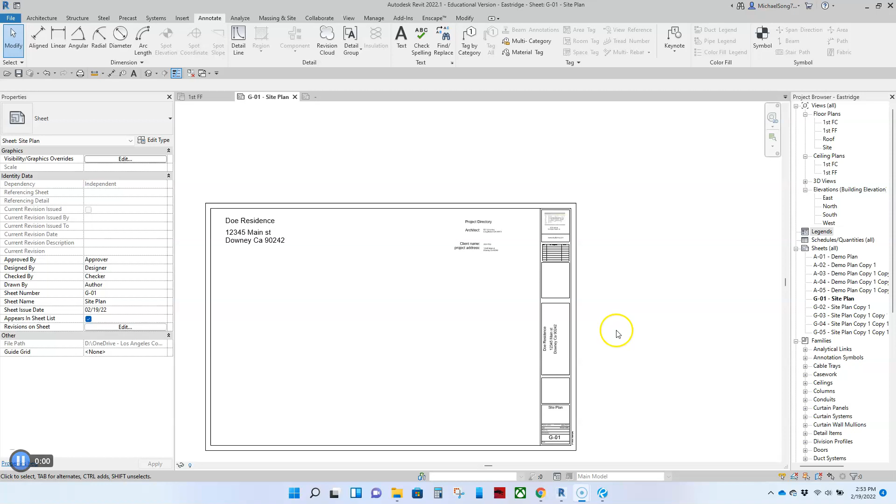All right guys, we are going to spend quite a bit of time on the cover sheet and how you should set up your cover title block and inputting all the information for the cover.

So let's just go back here. Let's create a symbols legend from scratch. Of course, if you guys are working at an office, they'll have all of these things for you, but I want to show you guys from scratch how to set it up. So let's do a symbols legend.

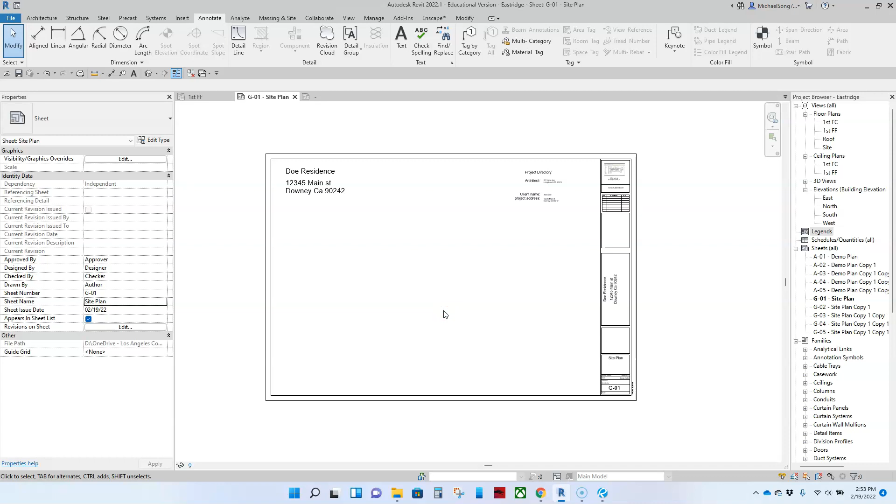The symbols legend really will be done on a template. We will cover what the template's all about maybe at another class or a more advanced Revit class. But in your case, let's just create one for your project.

So if you come down here to all your views, here's all your plan views. Here's legends. You want to right click and say you want to create a new legend.

So let's first describe what a legend is. A legend is almost like a family in a sense, but it's a separate sheet. Think of it as a separate sheet of paper that you can create whatever you need on, and then you can drag that onto anywhere you wish, into other multiple sheets of paper. So just think of it as a brand new sheet of paper. And of course it's a little bit more complex, but I don't want to get too much into that.

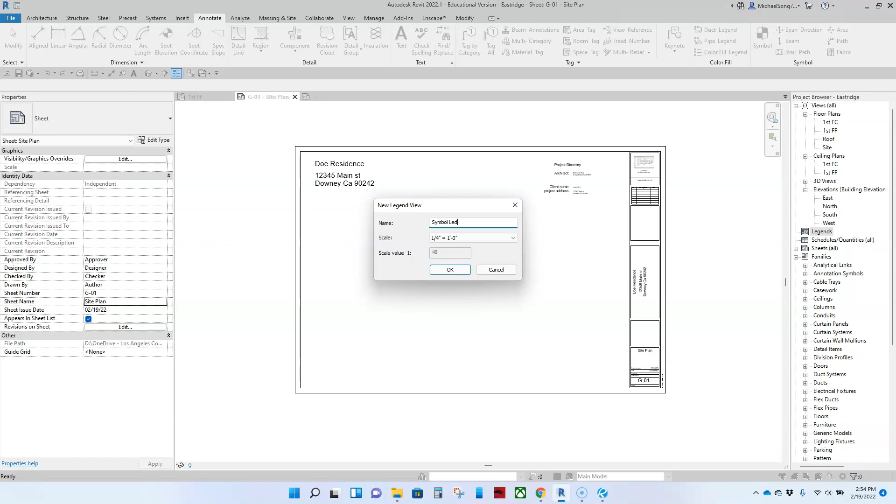So we'll just call this symbols. Symbol legend. Can't see my keyboard here. Jeez, I can't type this morning.

So now I have a brand new thing called the symbol legend, which I've opened up. It's just a blank sheet of paper. Of course, I can close it and then double click on it. So this is where I want to create a symbol legend.

View scale is kind of important because it's going to determine how big your text shows up on a sheet of paper. So let's just kind of go at it.

So what I did was I took a screenshot of my legend to just try to figure out how to recreate this thing. And I have a computer, so you guys can do it yourself also. So I'm going to say import image.

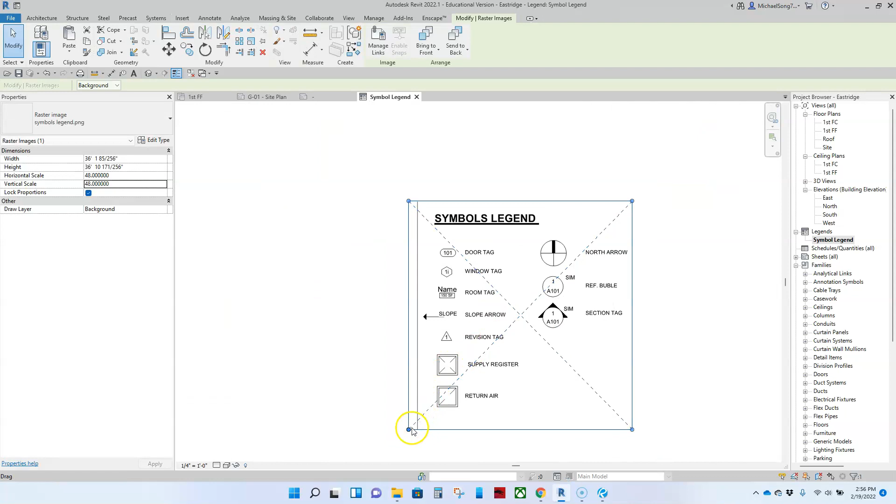So I have it in here. This is just a sample. So I first want to have a text called symbols legend. All right.

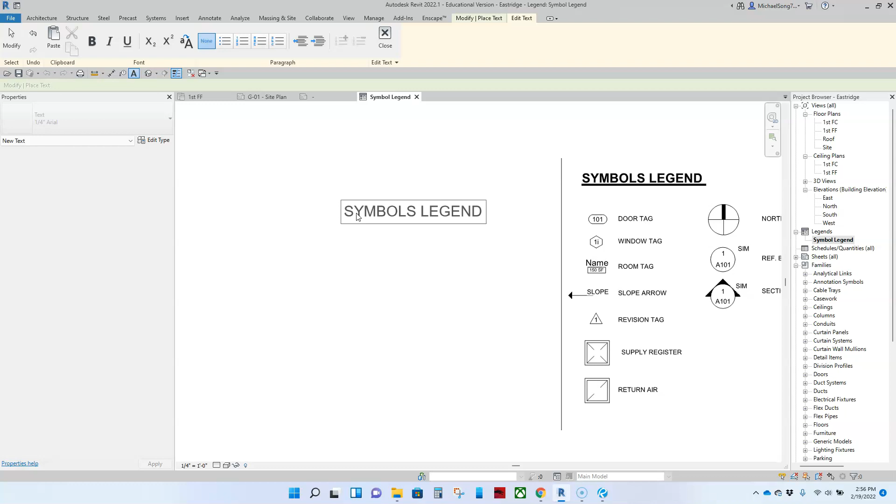1/4 inch sounds good to me at the moment. Yeah, all caps. Gosh, I can't type today. Okay, so I have that. Let's just put in a bold underline.

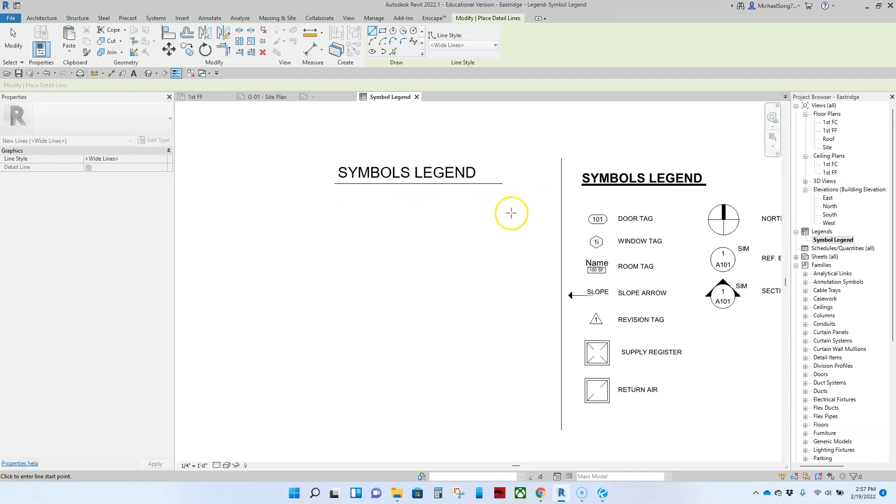So I'm going to go to detail lines. Oh, this is the first time I guess I'll be covering this, but line weights. By default, Revit comes with these line weights. At another time, I'll show you guys how to customize that. But I want wide lines, which is their thickest line that they have. If you kind of want to get a preview, although the preview is kind of not great, you can hit this button here, which actually shows you how thick that line is versus just the default view. So I'm good with that.

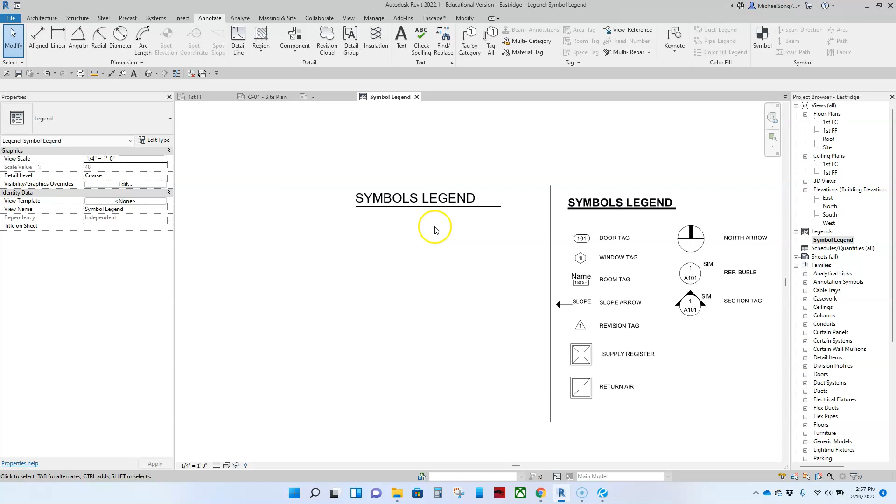Actually, as a matter of fact, let me show you guys later. All right, so let's first put in some tags.

So now you have a choice of actually drawing this little shape and then putting a text, just random text saying, whenever you see this, I mean door tag. Whenever you see this, I mean window tag. Whenever you see this, it's a room tag. So you can literally draw it and write it out from scratch.

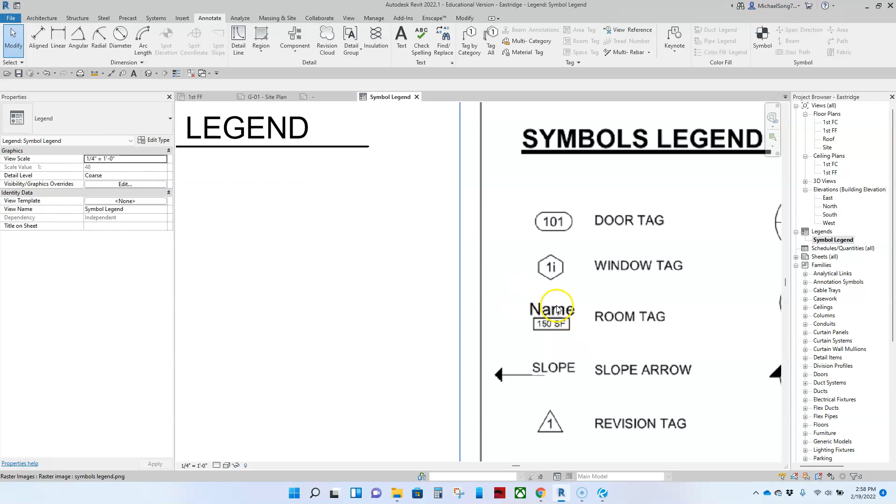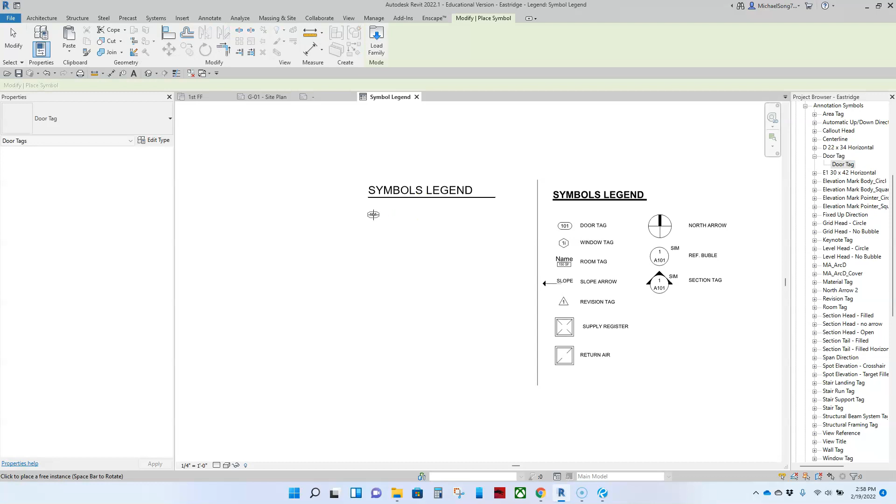But if we're going to use the Revit symbols, which they already did, then there's no reason to recreate that. So what I'm going to do is come down here to all the families that's loaded into my file, and then go into annotation symbols, and I'll see a door tag. So I can grab one of these things over, and there it is, right? And so this is a door tag. I didn't have to redraw it.

And you do have to do this part though. We're going to put a text. And since it's not a title, I want a smaller text. I am going to write, oops.

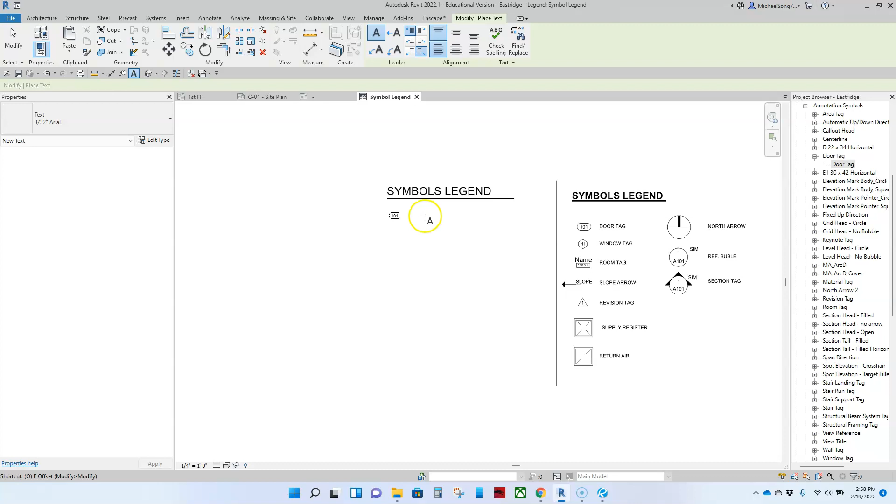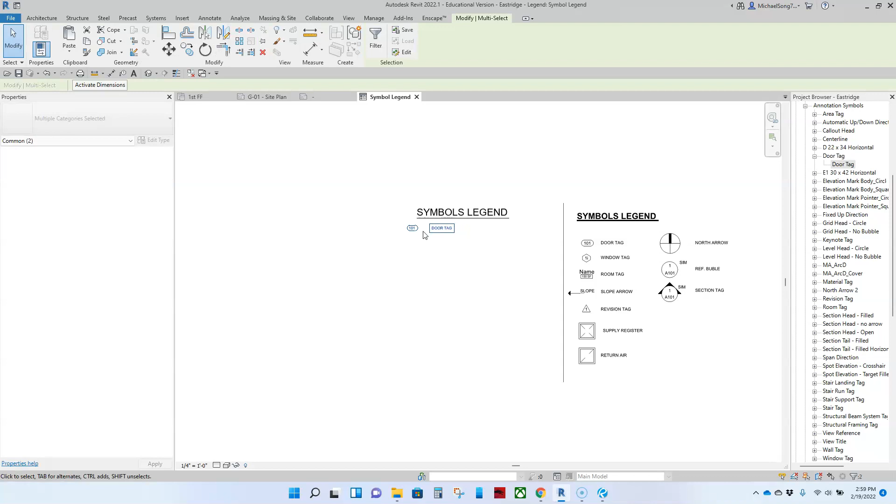So this is basically what a symbol legend is. We're just saying, when you see this symbol, this is what I mean, right? So I'm saying that's a door tag symbol. And I can make it smaller. Let me do some housekeeping here so that I can have 2 rows of symbols.

Into this now, the window tag, you will find it here. Let me put all the tags in, and then you guys can write your own names on it. Room tag.

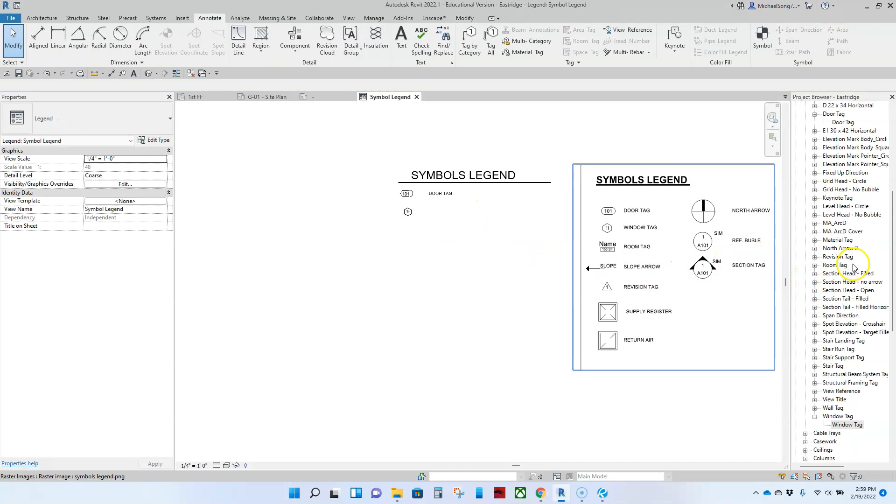So I have 3 different room tags here. Let's just take a look at all of them. I have this room tag, which is just a room name. I have this other room tag that'll give me a name and a square footage on the bottom. But there's no reason for me to do all the different tags that I have. Basically, when they see a square box, it just means it's a room tag.

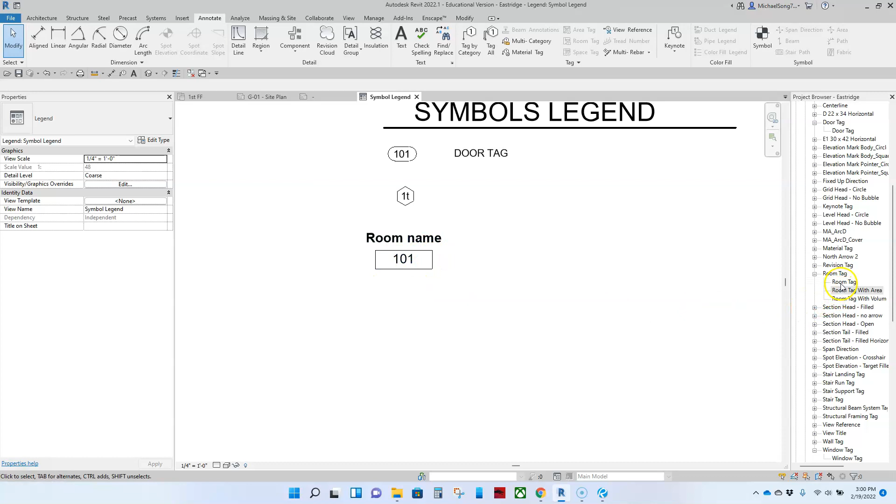So I'm just going to use the very first option here. I'm not going to do the slope arrow, but I'll do a revision tag. This will be the revision tag.

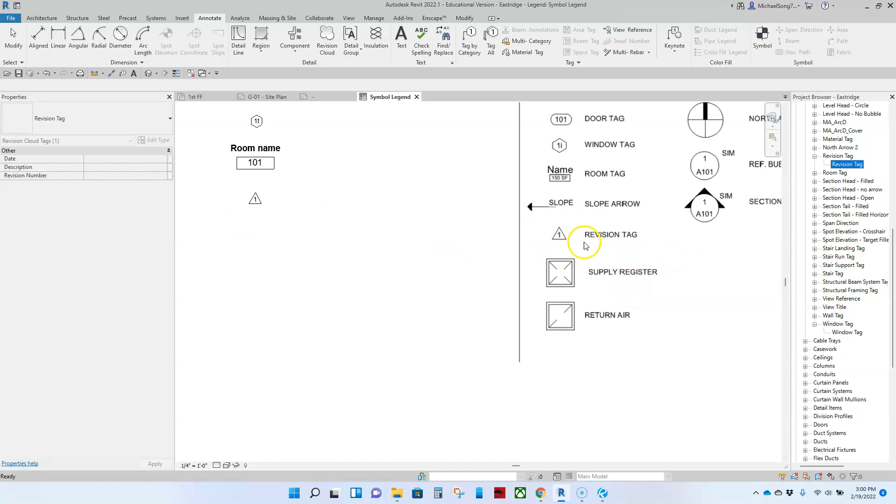Sometimes when we do HVAC, sometimes we don't do it. Again, you guys can load up all the tags here and pop it in if you like. So try to go ahead and find the tags and put it and make it look like my example or the handout. I'm not going to go through all of them. I'd like you guys to find and search yourself, but let me at least help you find these things.

So north arrow, what do I have here? Yeah, that's cool, north arrow. These are views, so if we come here, that's not what I want. No, I didn't need the view tag, my bad. So these are section cuts and stuff like that.

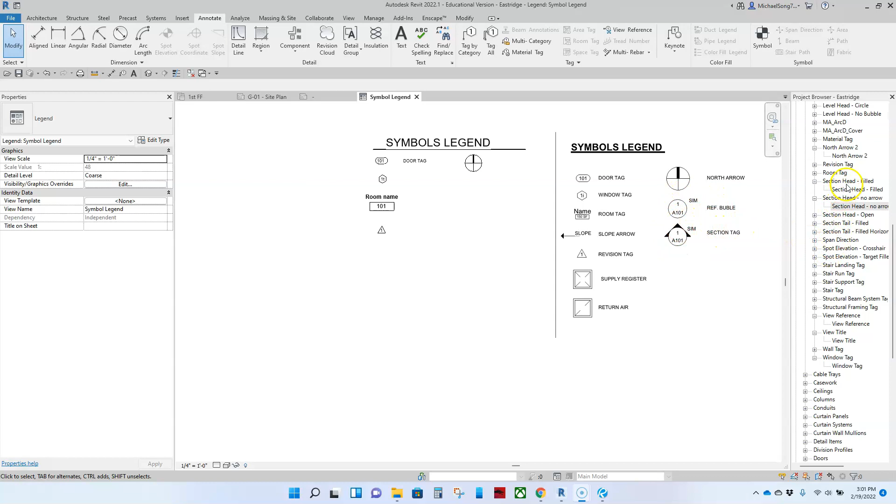So I can go to section head filled. If I bring that over, that's the arrow with the triangle filled in. I can bring the section head, but I don't want the triangle, so I'm going to say no arrow. Bring that in, and you guys can finish out the rest and put in all the text, okay?

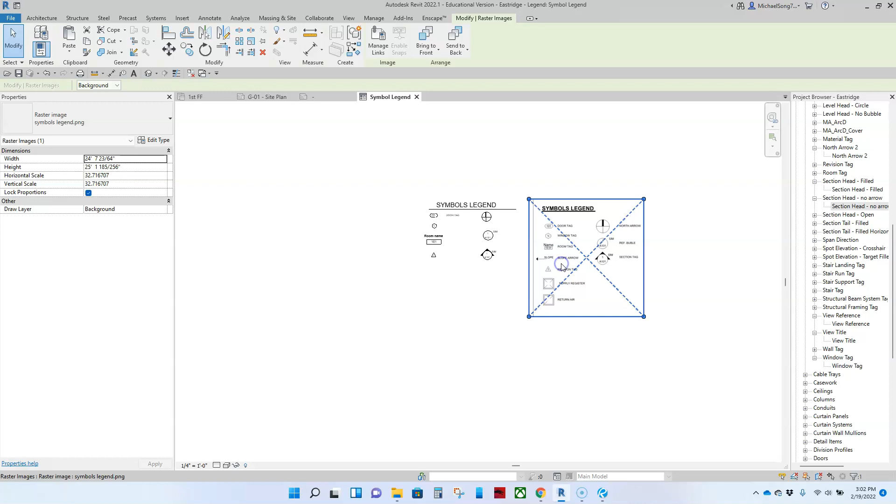So let me just show you. All right guys, I am back, and I've created the symbols legend here.

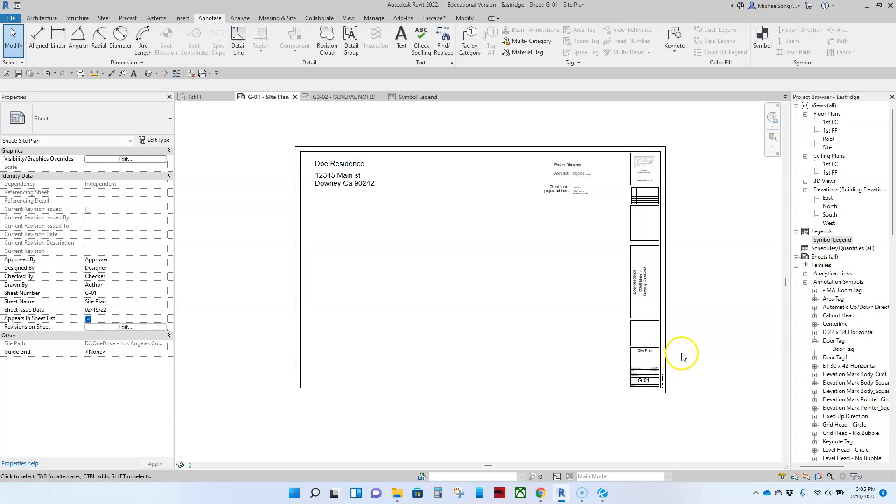Now let's figure out how to bring that symbols legend into our cover sheet, our site plan, or our title sheet. All you have to do is find your symbol legend, because we've created that. Just drag it out, and there you go.

It's going to show right down here, just like that, right? And then we'll do the legend, site legend, and we'll do all of these other things as we continue on with this demo.

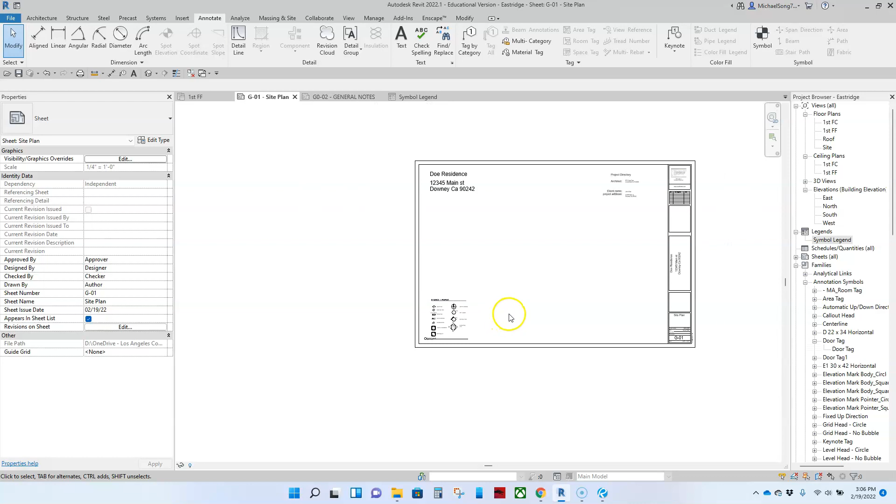All right, so here on the symbol legend, every view that you bring in should have a view title and a view title number. But in this particular case, I don't want a title. I already have my title here, and I don't want any numbers or anything like that.

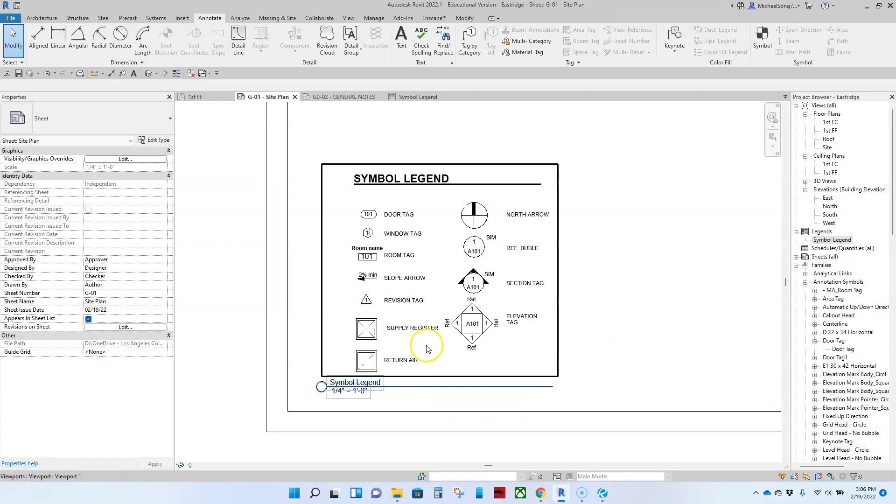So I want to get rid of this. Well, how do I do that? First of all, you guys have to understand the anatomy of a view. So this is this view, right?

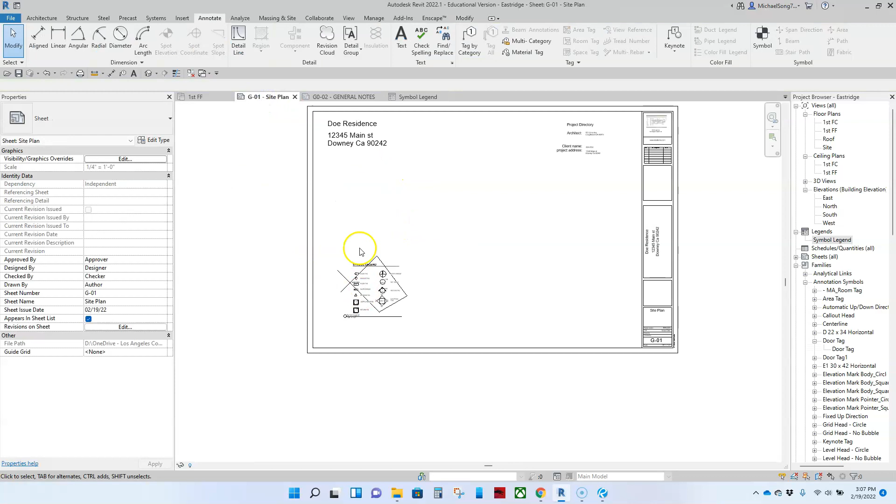So if I double click this, this is the blank sheet of paper I have, for instance, whatever I draw here. If I come down to my title sheet, it's drawn here. And so that little dark line, whenever I put my mouse over it, that's the window of my view. If I double click within that box, I'm actually in that drawing as if I'm editing that particular view, just like if I was here in this window here, right?

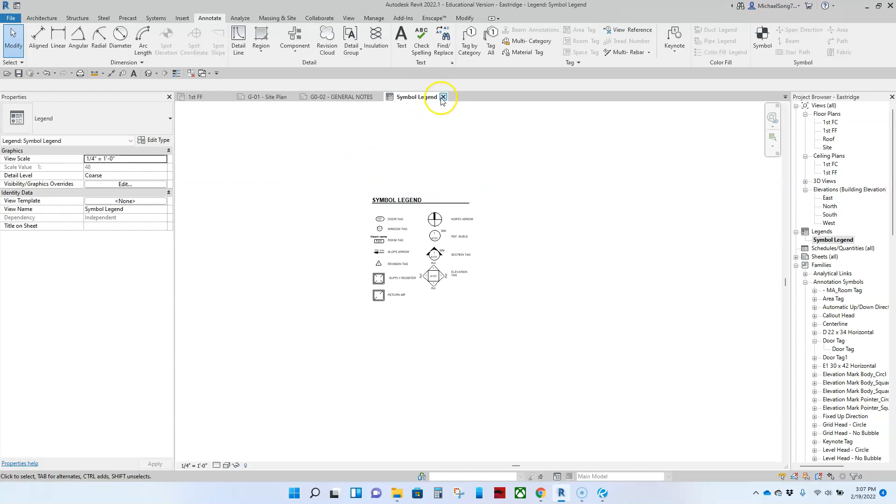Even if I close it, you notice that anything outside of the box is a little bit gray. It means that I am actually in that view, right? If I double click outside of it twice, now I'm in my overall view.

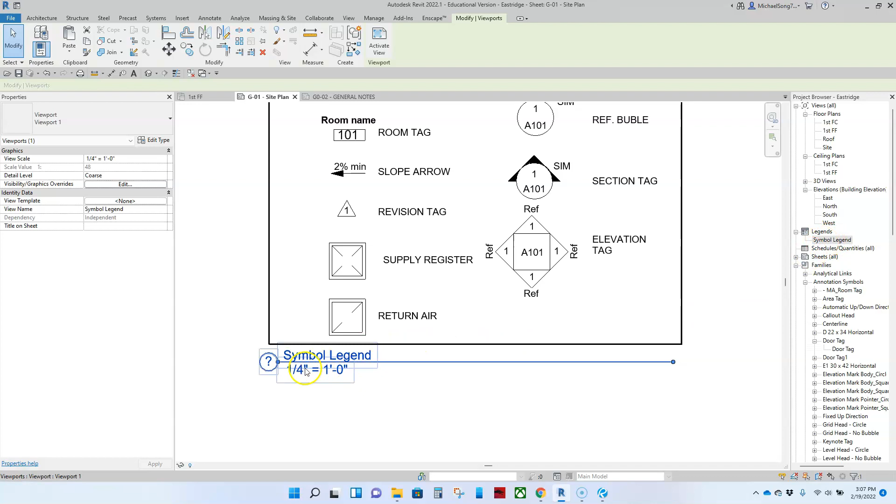So every view window obviously has a name. Well, where does this name come from? Well, from the name that I give it here. It has a scale. Well, where did that scale come from? If I double click here, again, I have my name, or I gave it a name, and then the scale of my view is down here, right?

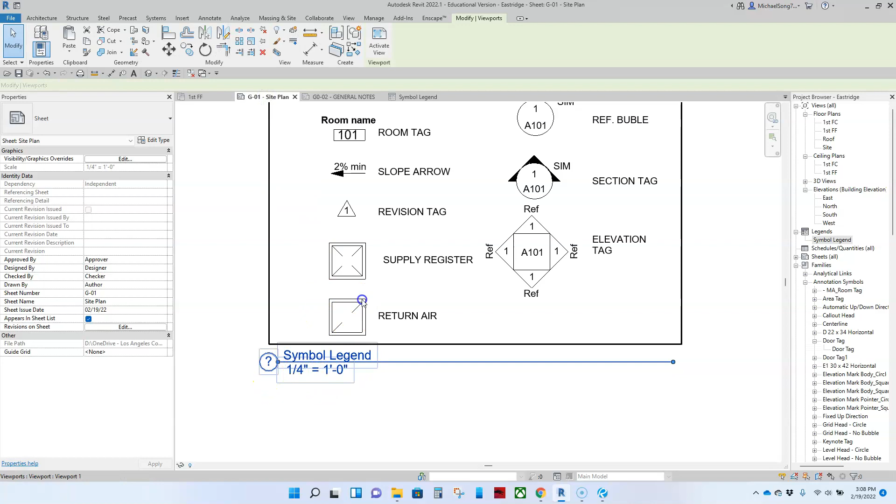So it's set up in particularly my legends view. That's where they get that information. And the number, I can name this any number that I want, this particular viewport, right? So we'll get into that.

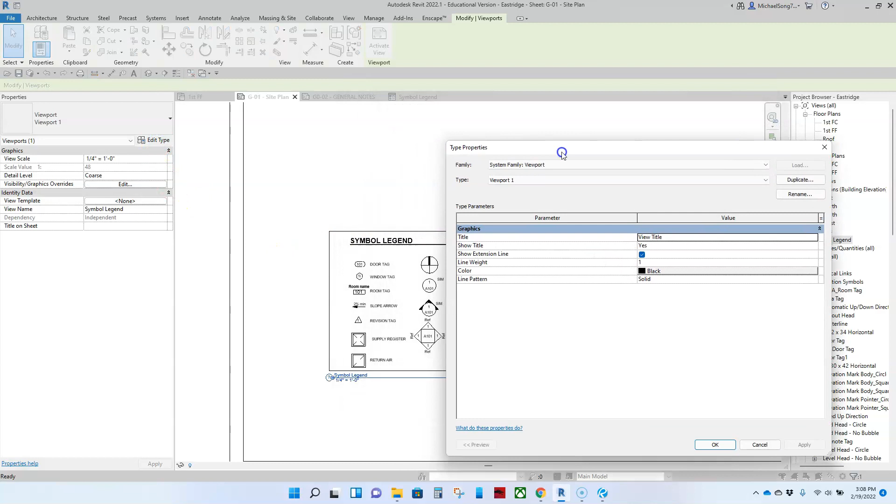But in this particular case, I do not want to see a name or a title of my view. It's going to be titleless. So if I click this, it's going to tell me that it's viewport 1. And if I go to edit, it tells me if I want to use the family viewport number 1, it's going to have a view title.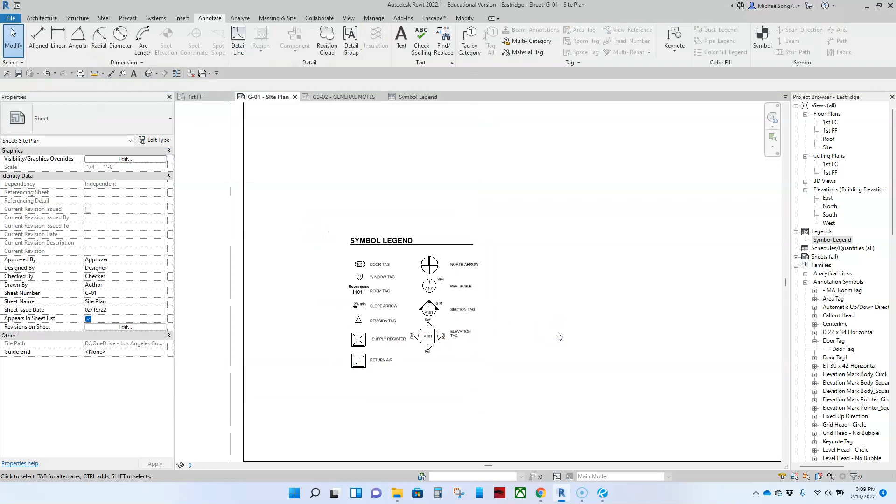So what I want to do is duplicate that and just say view. I'll name it myself, view title, no name, because I don't want any name. Then I can just say no, and let's see what that does. So there you go, it's gone now. It does have it, it's just not showing it. But if I now go to viewport 1, it'll show me this with the scale and the whole bit. If I go to no name, it'll just give me my symbol.

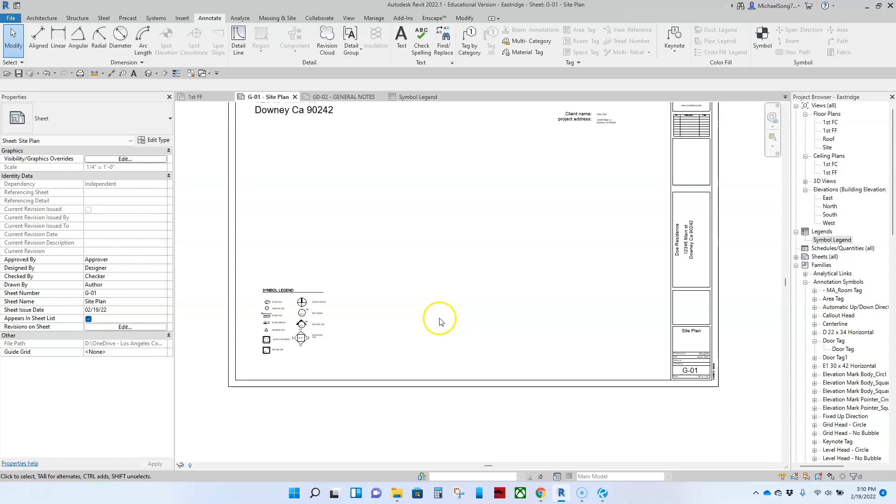All right, so let's go ahead and continue to make a little bit more legends. I realize this is going to take you guys a little bit of time because you're setting up everything from scratch, but please look at this as good experience and opportunity for you to practice.

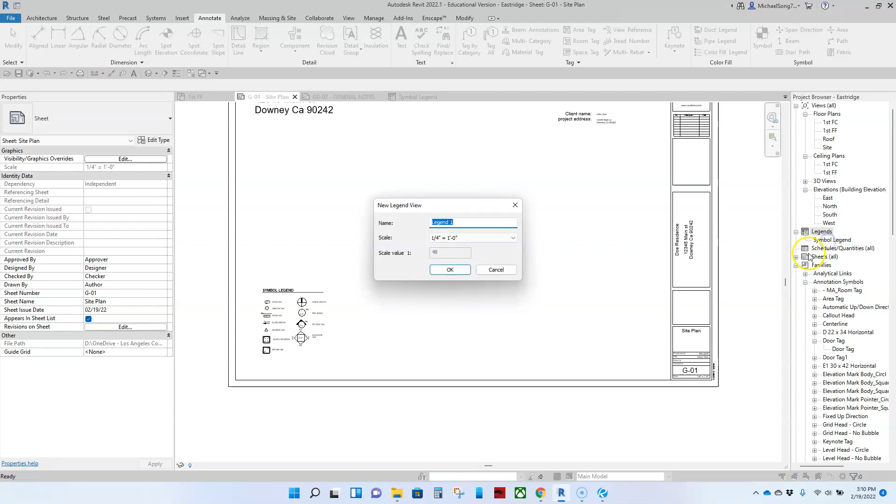Let's create our site legend here. Again, I'm going to come down to my legends, right click and say new. Site legend. I do have a screenshot again, just so that I don't have to flip my window back and forth.

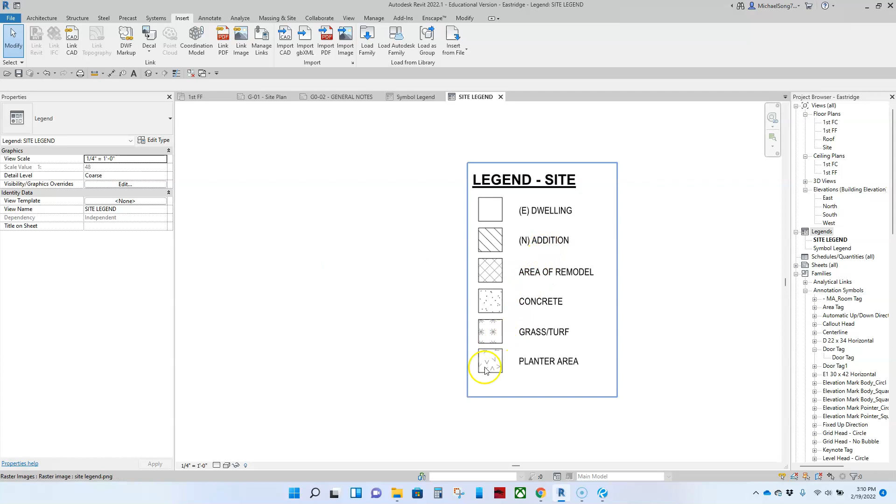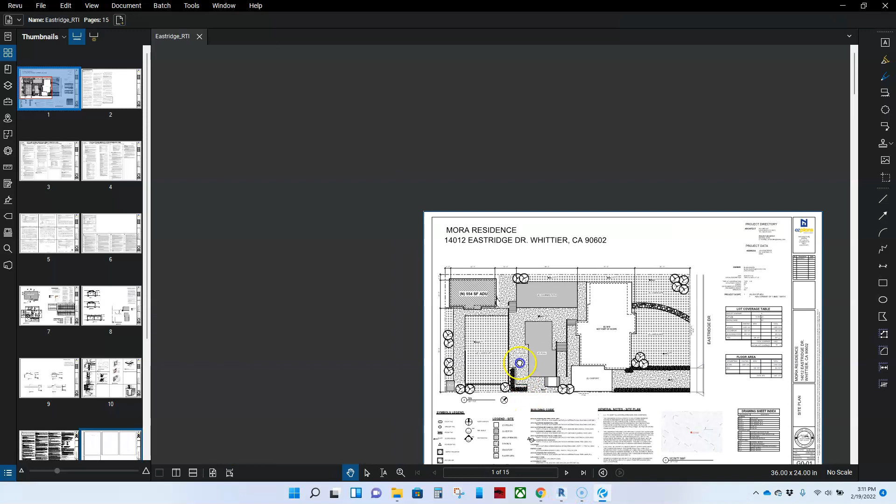So this is where I'm going to say on my site plan, if you just see a white hatch, that means existing house. If I give you a diagonal hatch on my site plan, that's a new addition. For instance, take a look here. That actually should not be dark, but here's a diagonal for new addition, for existing houses. If I show you this symbol, what is that? That's landscape, right? So that is all down here.

So let's go ahead and create our own kind of legend. And this one, I'm probably going to just do it from scratch.

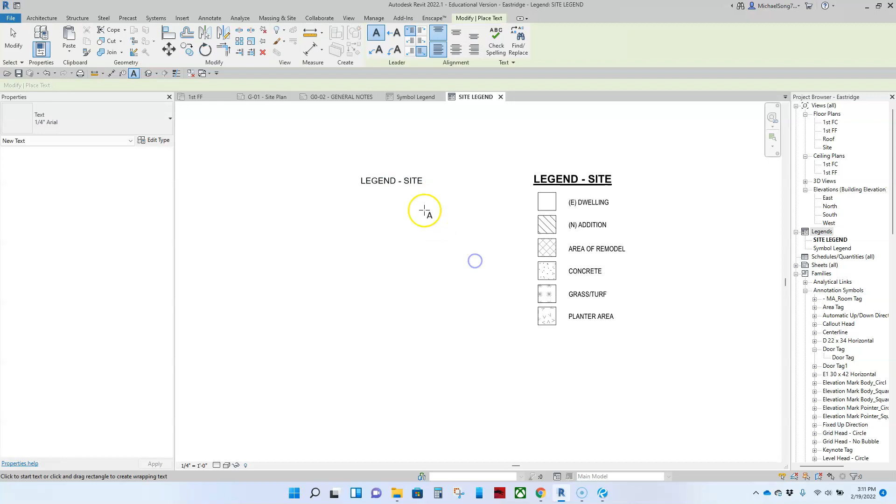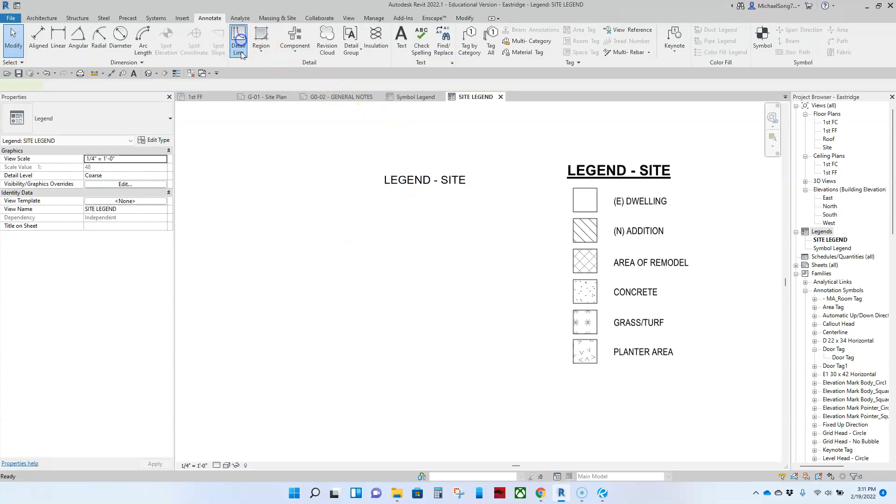So let's go to annotate, again, text. I want a large text for my title. And of course, if you want to make it bolder and stuff like that, go and experiment, guys. There's a lot of stuff right in here. So I won't do it in this example, but I need you guys to all experiment and be brave and try to customize it yourself.

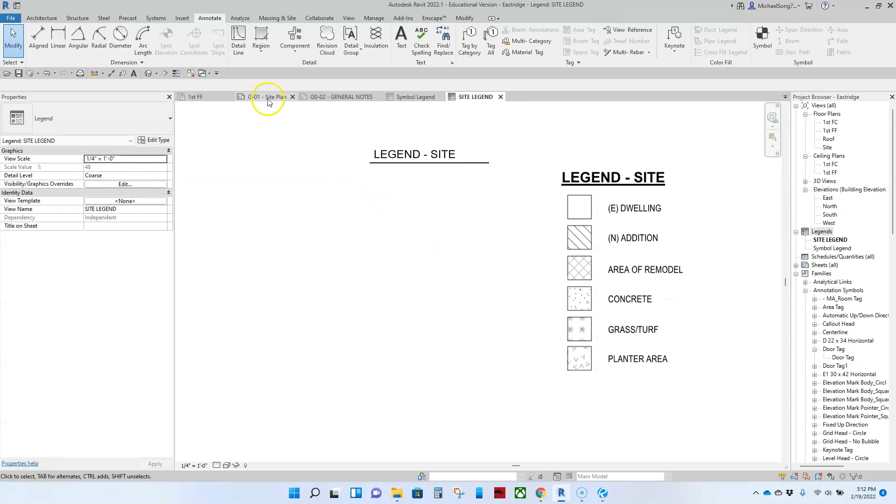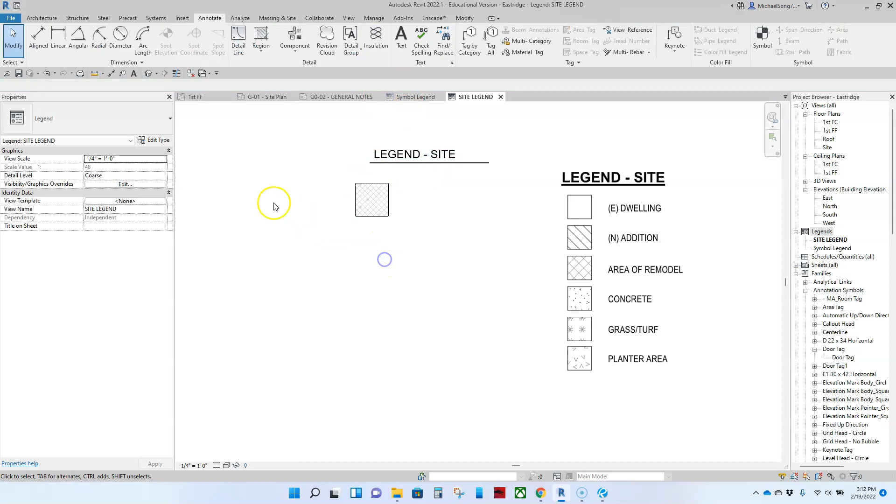All right, so in this case, I think what I'm going to do is a region fill, because that's what we should do in the office, which is basically draw a two-dimensional hatch. So I'm just going to click this and make a 4 feet by 4 feet box. Of course, it's 4 feet by 4 feet showing because we have it at a 1/4 inch view. And then click that - so this particular hatch that I've created.

So by Revit, by default, it's giving me all these hatches here. And you guys can create your own hatch patterns, but right now let's just keep everything out of the box as much as possible.

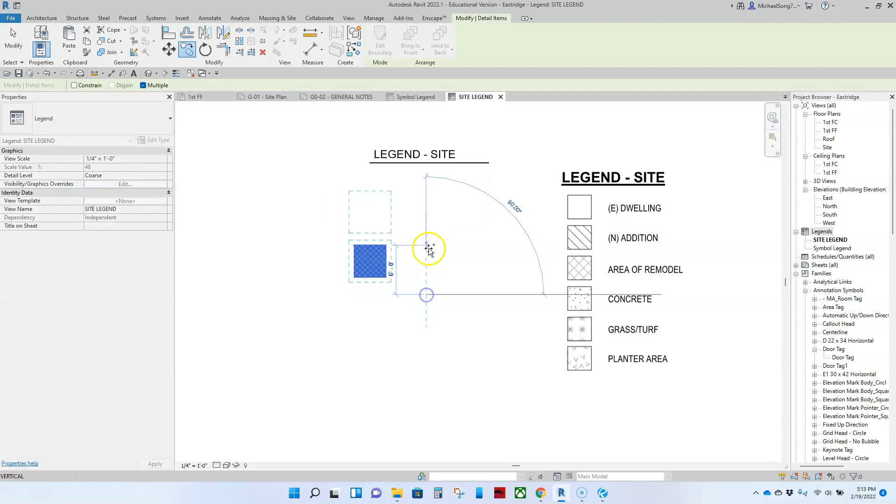So I think that one I'm going to use down here for a remodel hatch. Actually, I'm going to make copies of this. One, two. CC is the shortcut.

All right, so I have 6 hatch patterns that I copied, and I'm going to modify this to make this a clear white. So right now, the fill region is showing diagonal crosshatch. And I notice that I don't have a white right now, so I'm going to just go to solid black for now.

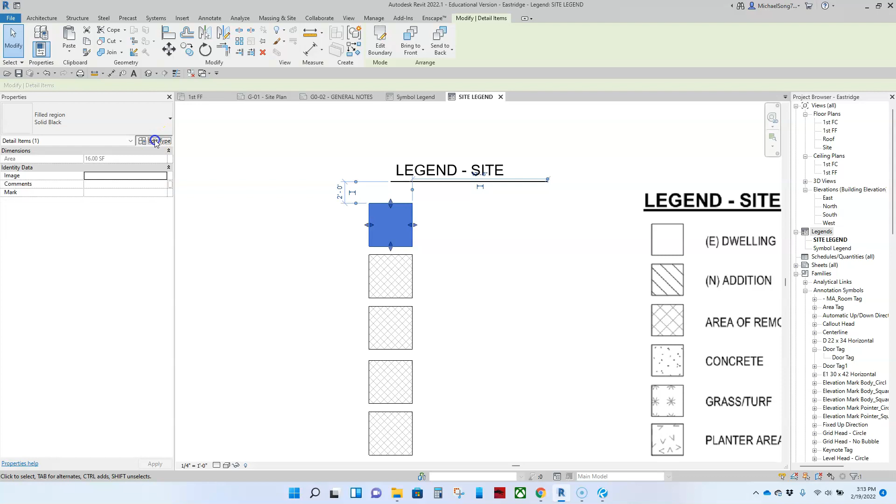And then on that solid black, I'm going to edit that. It says solid black. I'm going to duplicate, and I'm going to say solid white. Then foreground fill color to be white. Background fill color, I suppose it doesn't matter because my foreground is being filled, so I think that's fine.

In general though, I like to use the background as a solid color and then the foreground as textures. So in this case, if you want to be anal about it, I don't even know if I can do none here - oh, here. I can go none, meaning I don't want anything in the foreground, so it doesn't matter what color I put in. And my background fill color, I want it to be solid, and I want that to be white.

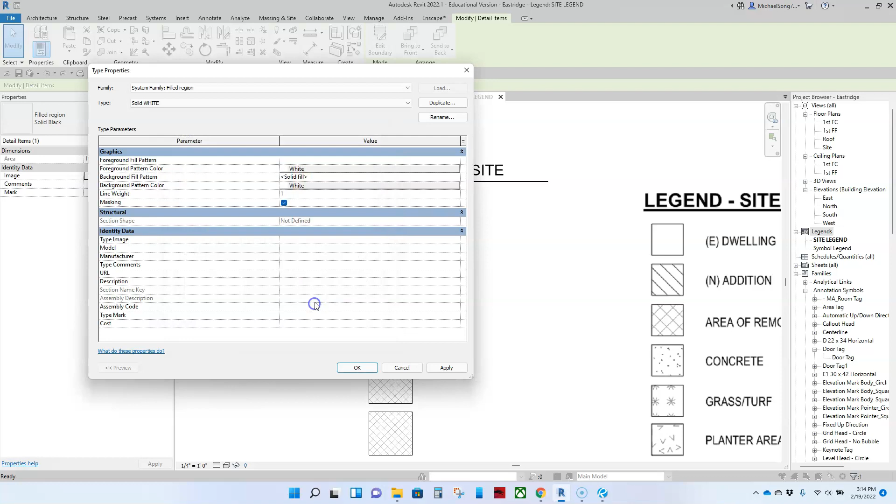So in effect, right here, I turned off my foreground. It doesn't matter what color I put here. My background, I want it white, solid, and okay. So now that's white. So if I want to copy kind of one diagonal crosshatch, I guess it'll be diagonal down. There's that. That's fine.

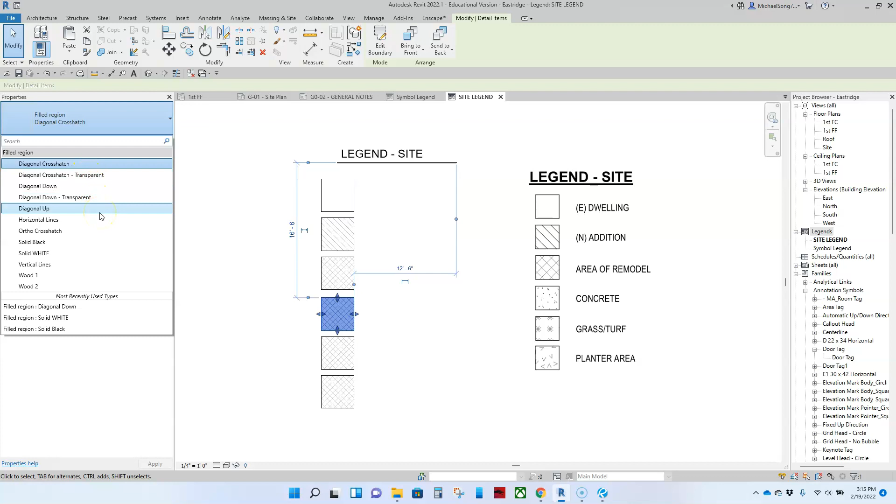Concrete. Do I have a concrete? I do not have concrete. So again, I'm going to just take any crosshatch. Let me just take the white one that we just made.

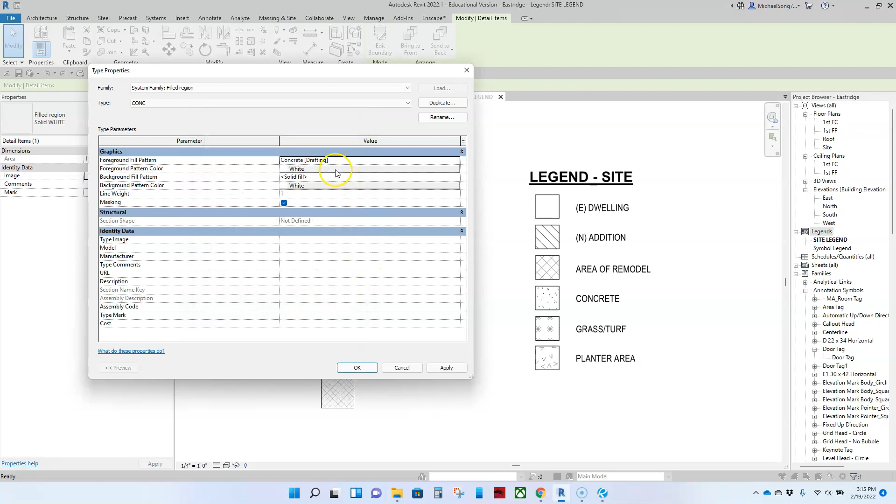I'm going to edit that. Go to duplicate and just say CONC. No period. And in this case, this is a good example actually. My background color, I want it to be white because I just want it to be solid. But my foreground, I want it to be a pattern, this concrete pattern that we have. And I don't want that pattern to be white because I can't see it, but maybe I want it to be a light gray or a dark gray. So what I'm saying is that I want you to fill in a white box, and on top of the white box, the foreground, I want you to put a gray concrete pattern. So there you go on there.

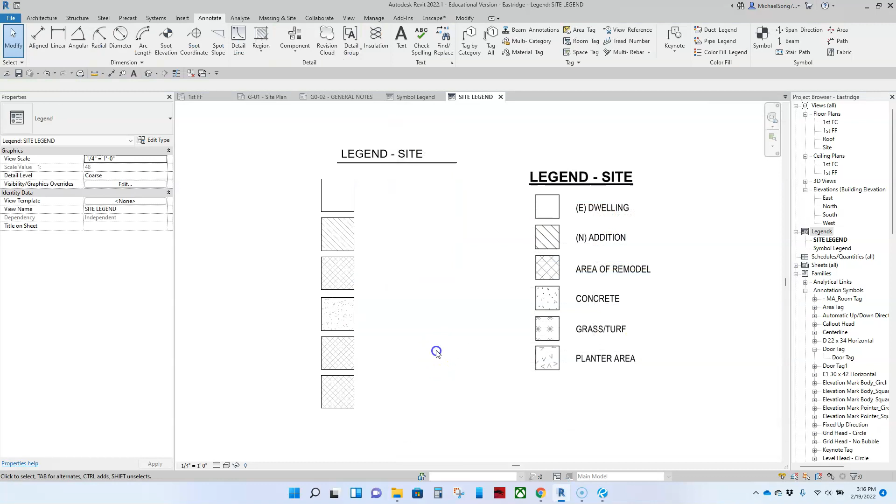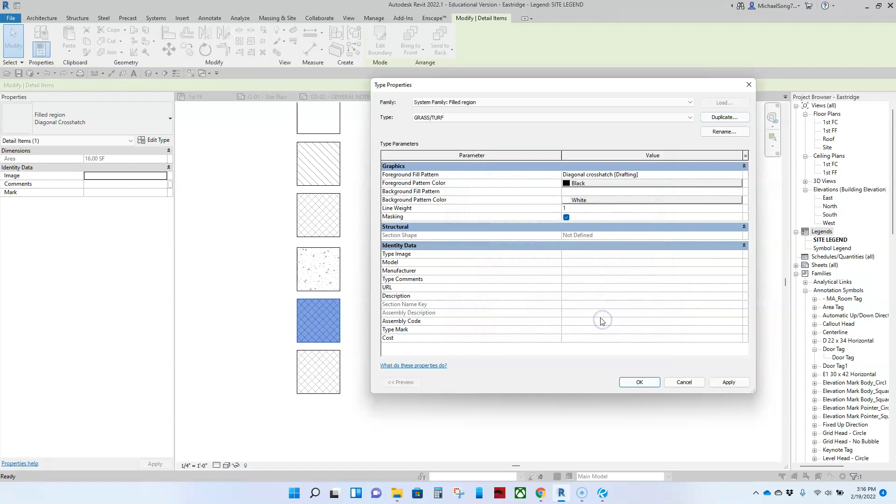And let's do grass. I don't even know if I have this texture. Duplicate. What do I call it? Grass. Okay, so I'm going to say duplicate, and I'm going to say grass slash turf. Shoot, I should have taken the white. So I want my background to be white, solid white, and my foreground to be... so there is no grass or turf pattern loaded here. Model. Nope.

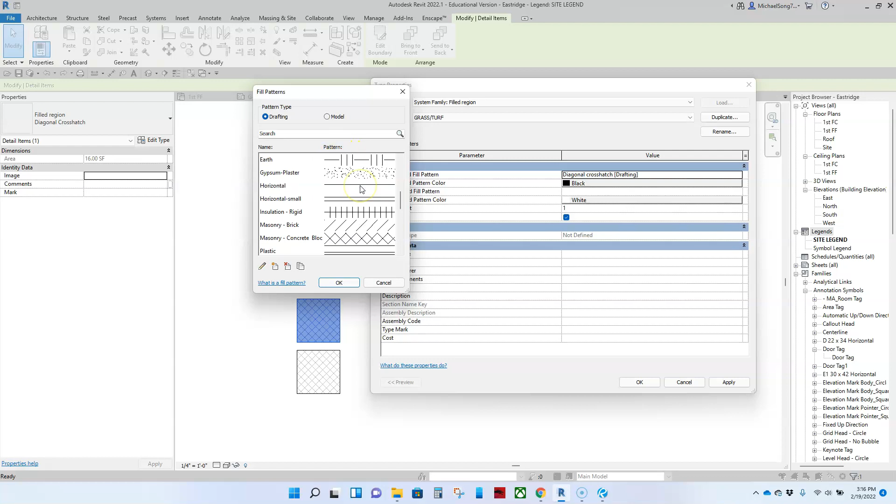I guess I'm going to have to give you guys something because creating a pattern from scratch in Revit is not easy. It's easier for you to import them in. So the new patterns are more easier to import, I actually imported most of my patterns from AutoCAD.

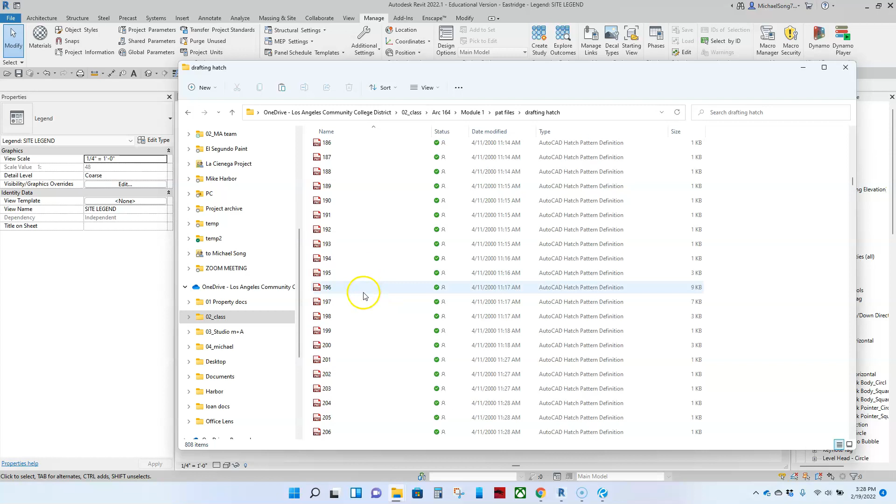All right guys, I debated how I was going to show you guys how to create custom hatch patterns, and this is the best I can do. If you guys go back to the download, I actually uploaded onto the ARC-164 Module 1 folder. I'll create a link for it eventually, but you'll see a pattern file. This is my personal library of all the patterns. So I have a bunch. I have not taken the time to name them. So you can see I have hundreds and hundreds of these things. So go ahead and please download them. And then once you download it, you can actually open up that file in Revit.

So this is how you would do it. You would select one of these things and you want to edit this hatch. Go to edit type, and obviously you want to duplicate it because you don't want to copy over the diagonal crosshatch. So we'll call this one grass slash turf. All right, so now we have a brand new pattern called grass slash turf. We do not want to use this hatch. Dang it, I keep on making the background white, and then come down here, and this is what Revit comes out of the box, these kind of standard hatches.

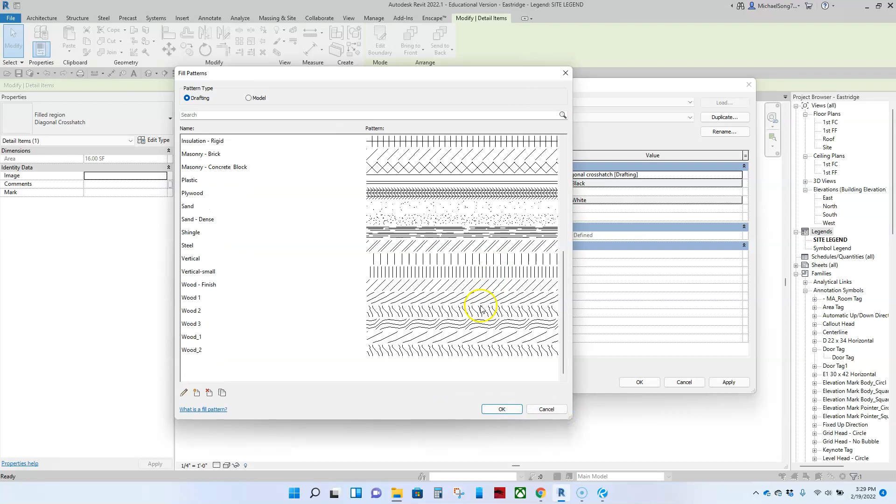Well, if you come down here, you can create a brand new pattern, and you say custom, and then you browse. And then you are going to go to the folder where you downloaded my hatch that I'm going to give you a link to. And unfortunately, I didn't have the time to name them, so you're just going to have to figure out which one is which. But I do have tons and tons of them. So feel free to just kind of bring them in and figure things out.

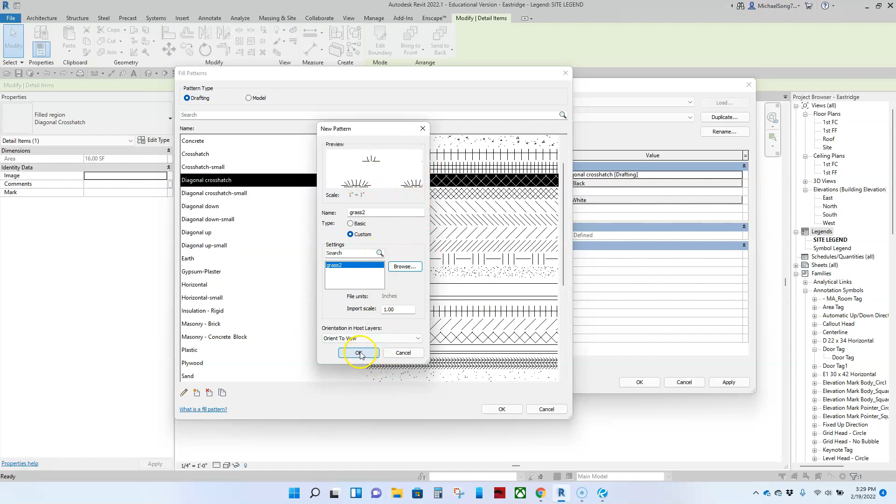I'm just going to take one, I think I started one a long time ago called grass. So here is grass or ground cover. And I'm sure it's not the same grass that I'm using on my template at the moment, but it's okay. So here's some hatch patterns, right? You could also make them smaller if you like, if it comes in too big. Let's just go 0.5. It's a pretty bad hatch, but it's okay. So there it is, I'm going to say okay. So whenever I want grass turf, I want you to show me this hatch. And there it is, right?

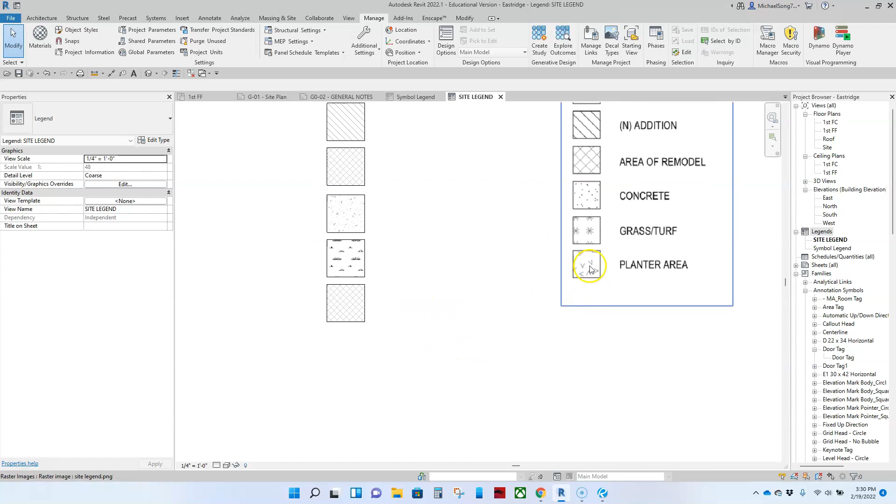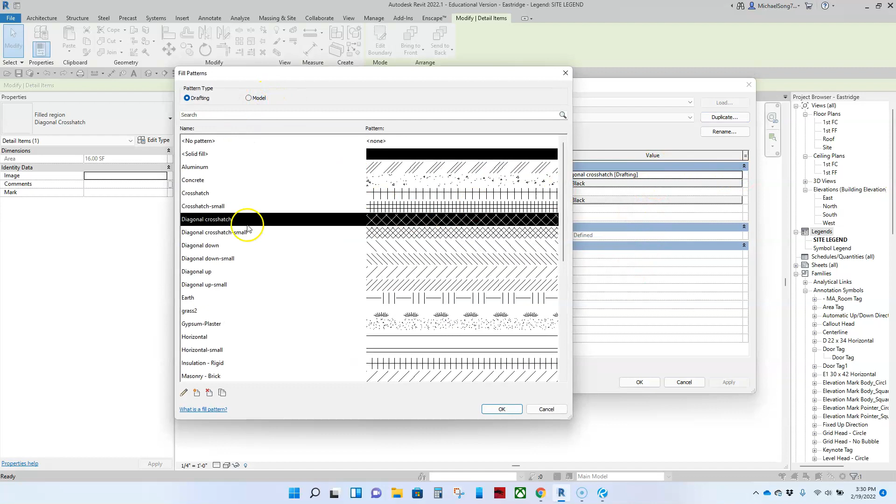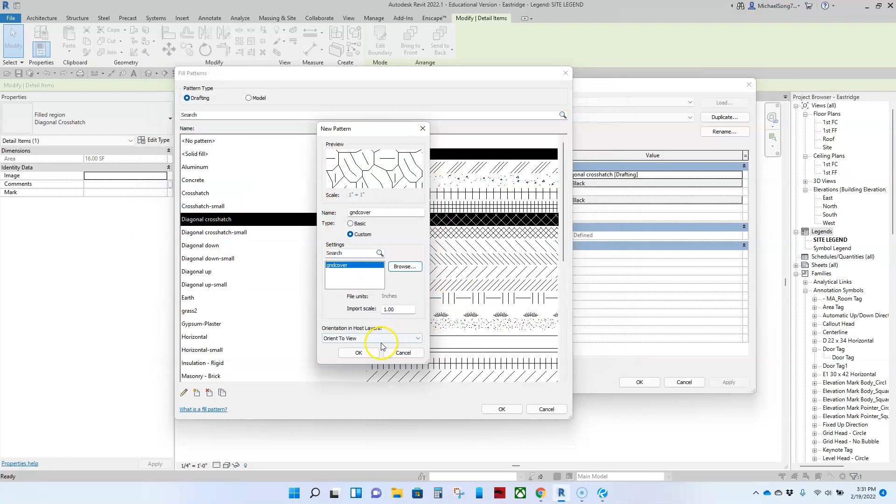And then I'm going to pick some other random stuff for planter area. Now, again, if you don't get the perfect hatch pattern, I don't care. It's going to be different from office to office. Duplicate. What is it? Planter area. New. I'm going to pick number 39. No, that doesn't look good. Oh boy, we can be here forever. Man, I have no idea what these things are. Oh, there's ground cover. All right, I'll take that. So there you go.

All right, so that's how you can create your own little hatch patterns. And then of course you're going to put your text next to them. And then we're good, off to the next demo.